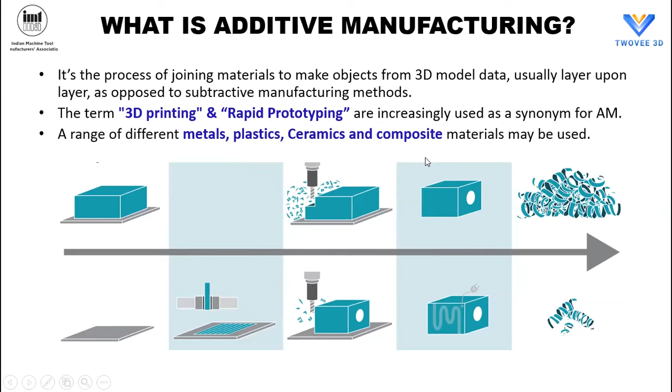That's the reason why this technology has become very popular, and we say this is going to be the future technology which industry will adopt to address many manufacturing challenges, or how to reduce manufacturing time.

Typically, I tell all the people that it is not that additive manufacturing will replace conventional manufacturing. It only complements conventional or subtractive manufacturing. They work together to bring speed into manufacturing activities and also address challenges where certain designs cannot be done with the subtractive way of manufacturing.

This is a good example showing how additive manufacturing has benefits over conventional manufacturing. A typical teacup, if manufactured with conventional machining like CNC, requires taking a bar stock, creating the internal cavity, machining to get the undercut, making the handle as a separate part using welding, brazing or soldering to fix it, and then machining the bottom. So there are multiple processes involved to finish this component.

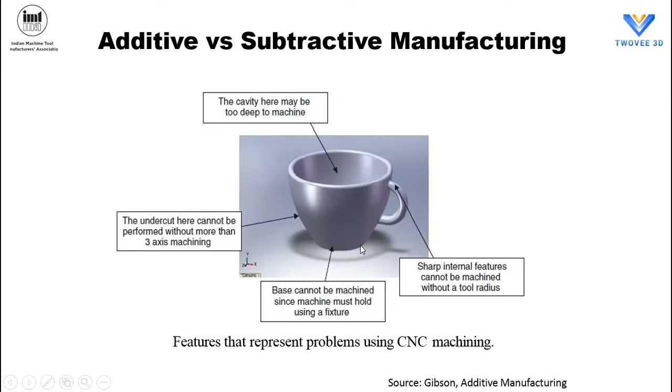Whereas the same cup, if done through additive manufacturing, is made as just one single assembly—it starts from the bottom, building the base, and as the layers build up, it gets the shape and size we want. So that's a good example showing how additive manufacturing simplifies the manufacturing process.

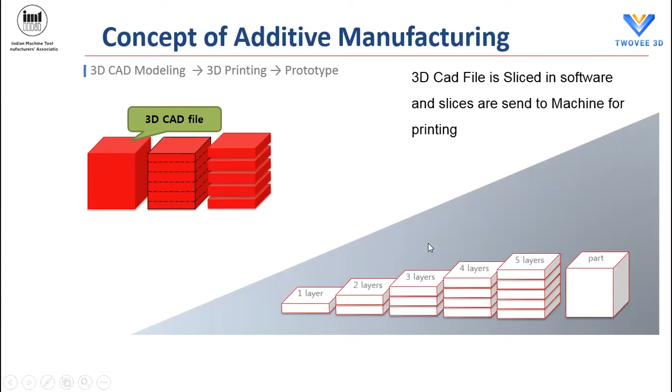As I mentioned, the 3D CAD file is an important input for this additive manufacturing process. Using this 3D CAD file, parts are built layer by layer, and we get the shape and size we want. The typical AM process consists of these 5 steps.

First, the most important thing is the creation of the solid model. Most current day youngsters prepare their drawings as well as 3D models with CAD software, maybe SolidWorks, CATIA, or AutoCAD—most of them are familiar with that.

But there is additional technology involved when preparing the 3D model for additive manufacturing. This is the knowledge engineers need to add on to the CAD knowledge they have, so that they can make the model additive manufacturing friendly.

Once we have that model, it's typically converted into a neutral file format called the STL file. The reason is the STL file is a neutral format which can be opened in many CAD softwares, as well as pre-processing software that most machine manufacturers provide.

We also need to ensure that when the model is converted to the STL file, we don't face any problems where some features may not be completely captured. So that's the additional care we need to take to ensure the STL file properly captures all the features.

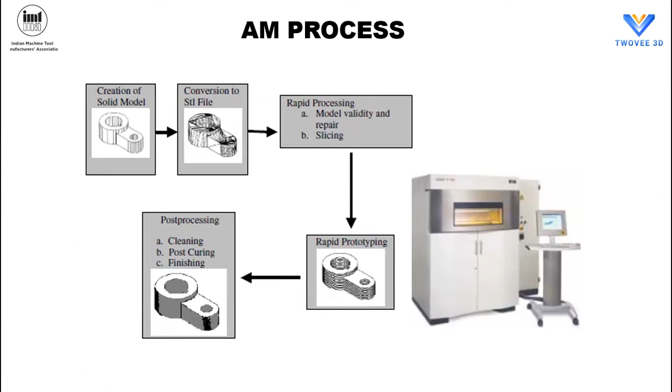And then, of course, today the technology has much improved. There is a lot of automation which has happened to enable this. But as an AM person in the organization, you need to understand all this technology.

So what are all the AM processes and the materials which are available today to the industry? This is the way the additive manufacturing process has been classified by ASTM. There are basically 7 types of additive manufacturing processes, and whatever new process comes up, ASTM is able to classify it among these 7 types. The first one is photopolymerization, VAT photopolymerization.

It was also called stereolithography. This is a technology which was there almost 35-40 years back, and it was limited to plastic. You can also see the dots I have put here - these dots indicate the raw material type. VAT polymerization uses liquid as the raw material, and then either you use a thermal source or a photo source to solidify that liquid. Both the solidification and the layer thickness are controlled so that you finally build the part.

Subsequent to stereolithography, other things also came in, like liquid thermal polymerization or beam interface solidification. They are all classified under the stereolithography process.

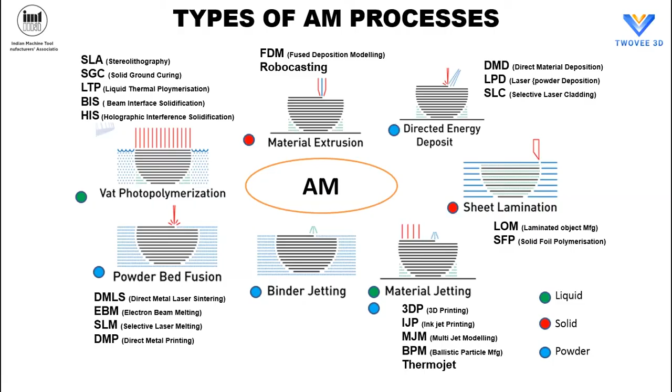So that's the wide range of processes we deploy for additive manufacturing. The materials used in additive manufacturing play a big role in producing quality parts, whether it's the FDM process, laser sintering process, or material jetting. The powder, the raw material, plays a big role - it decides the strength of the part, whether tensile, compressive, or fatigue strength, all decided by the alloy as well as its purity, and its geometric parameters play a big role too.

And it also decides the surface finish of the part, and the accuracy of the part we can build.

The raw material is another important part of the AM industry, and it is a special process, especially when you have to have a powder. They use a process called the atomization process, wherein we control the size and shape of the particle, the distribution of particle sizes, the oxygen and nitrogen content, and the density of the powder. These are the important properties which need to be controlled.

There is a lot of material science and metallurgy involved. In fact, there is a lot of research and development around this whenever a new material is developed for the additive manufacturing process. The microstructural analysis, and once the part is built, if there are any blowholes or cracks, how that can be controlled by properly controlling the energy source, plays a big role in building a good quality additive manufacturing part.

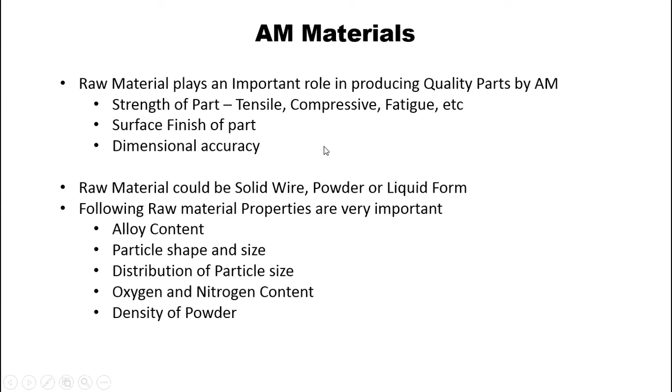So this table, I will not go through in detail, but just to give you a glimpse of the material types, as I told, it could be polymers, metals, ceramics, or even composites. Then what AM processes is used?

If it is a polymer, as I mentioned, the most common process used is either laser sintering, fused deposition modeling, or 3D printing. These are the technologies widely used for a wide range of plastic materials, whether thermoplastic or thermosetting type. You can see the range of materials used - almost all the polymer variants used across industries are possible to be done through additive manufacturing today.

For metals, the technology is basically laser or electron beam technology, called either laser sintering or laser melting. You can see the range of materials covered today, and this is growing every day. In fact, about 4 to 5 months back, copper was not easily printable. The Objectify company in Delhi optimized the laser process so that they can build copper alloy also using additive manufacturing. And as you know, copper is a very good conductor, especially for many heat exchanger applications.

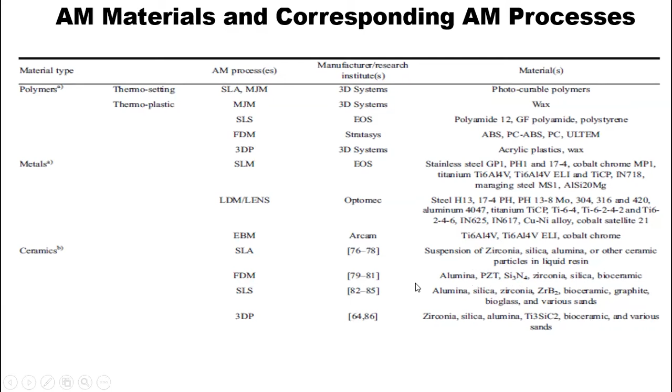So all the silica based, all those composite ceramics can be done through additive manufacturing. Similarly composites - whether polymer to metal composite, polymer ceramic composites, metal composites, or carbon reinforced plastics - all that could be done through additive manufacturing. Even functionally graded materials, where the property of the material varies across the dimension of the component - such varying strength components can also be produced through additive manufacturing, either by having different materials, or introducing blowholes or gaps in the way you build the property, or through cellular structures.

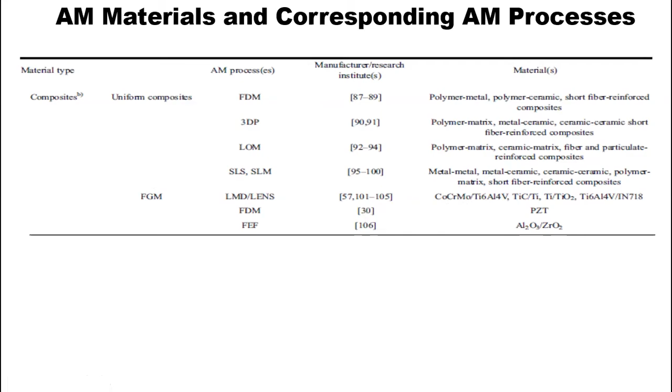So that's the process and the materials. I'll talk about the applications and benefits together so that you will understand in a better way.

One of the big applications where we get the benefit of additive manufacturing is in weight reduction. Because of the way the part is built, it is easy to build a part by taking out material where it is not needed, depending on the functioning of the part. As a good example here, what is shown is the seat buckle, used in aircraft, and of course also used in many automobile applications. Typically this is made of conventional steel, and the part is designed this way so that it is easy to produce, keeping the cost into consideration using conventional manufacturing. This buckle typically weighs about 150 grams.

Now with additive manufacturing, if you just modify this design, you need to ensure that you are meeting all the functionality of the part, but wherever there is an opportunity to take out material, you can do that so that the weight reduces from 150 grams to around 70 grams. And since you are manufacturing out of additive manufacturing, this part is very, very easy to manufacture.

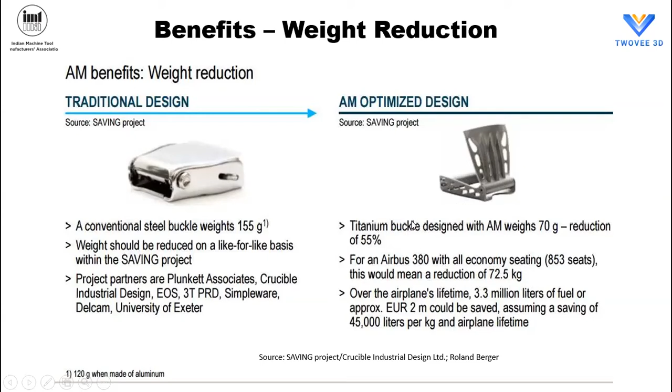In an aircraft, every gram of weight you save leads to fuel efficiency. In fact, in an Airbus 380 aircraft with about 800 seats, you save a weight of 72.5 kg. Just imagine over the life of the aircraft, what fuel saving and economy benefits you get out of this. So this is a good example, especially on weight reduction.

There are a lot of applications. Topology optimization is one design tool wherein you can optimize the geometry, keeping in mind how the stress distribution happens in the component. For example, this bracket, you can see there are a lot of areas with very low stresses, and you can take out that material. So by optimizing, you can reduce the weight almost by more than 50%.

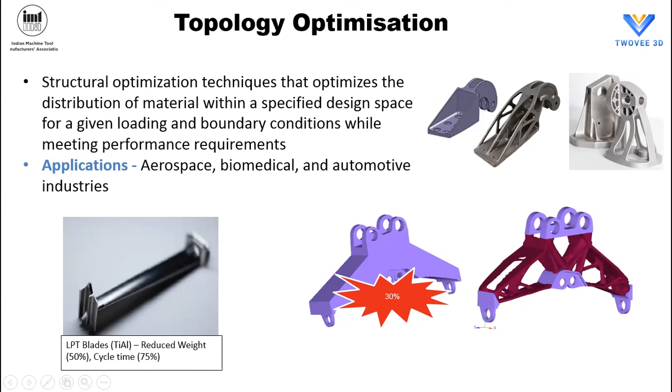In fact, this is one of the engine mounts which Honeywell designed, wherein you can optimize it by reducing the weight. And this is the low pressure turbine blade used by General Electric for their LEAP-X engine aircraft, where the weight is reduced by more than 50%, and the cycle time reduction is also 75%. So this is one of the big benefits we get from additive manufacturing, wherein we can optimize the weight without affecting any of the functionality.

In additive manufacturing, one of the cost elements is decided by the powder or raw material you are using. By optimizing the weight, you're also reducing the powder consumption, and you're also reducing the time it takes to build that part. And then, of course, ultimately, all that helps in reducing the cost.

The other big application is customization. Wherever customization is required, that can be easily done by additive manufacturing. There are few reasons why it can be done very easily, because there are no tools involved in additive manufacturing, and customization doesn't involve multiple processes. It is just one single process where you are building the part.

Any feedback you get from customers for the customization can easily be incorporated. Whereas with conventional manufacturing, it is very difficult. Whether you do turning, milling operations, or use casting or forging applications, there are tools involved, and any changes to that design also require you to modify the tools and the manufacturing process.

The example I'm showing here is for the medical application, and this is just an example, but as I mentioned, wherever customization is required, that can easily be done. In dental applications, the crowns which are used—in fact, every individual is different, and you cannot have any standardization here. And of course, it also needs very high strength, and most of this is done out of titanium, which is a printable material with additive manufacturing.

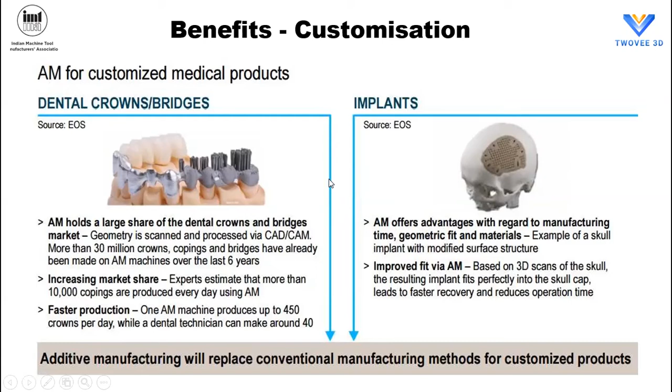So there's a big application of customization required in the biomedical industry, and additive manufacturing has been very widely used.

Then there's the complexity of the part you can build using additive manufacturing. You need to make the part more complex so that you get better performance. That is one thing. The other is you can make the component at a lesser weight, and then you can make it at a lower cost.

With additive manufacturing, irrespective of the complexity of the part, the cost doesn't vary much—it's almost flat. Whereas with conventional manufacturing, if the part is very simple, the cost could be less, but as the complexity increases, the cost increases exponentially. That is where you start getting the benefits of additive manufacturing for complex designs.

There are a lot of applications of additive manufacturing where you can come out with very innovative products, leveraging additive manufacturing, so that some of the limitations we had in manufacturing such components with conventional manufacturing are addressed very easily, and you can get the best performance from the designs. So the innovative design is...

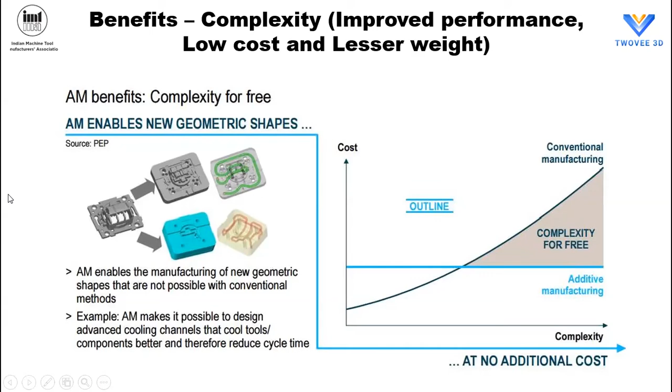I'm just showing one example where the cellular structures, or the helicoil designs, were known 20, 30 years back, but applications were very limited because of the difficulty in manufacturing this. But now with additive manufacturing, all this is possible. So you can improve the strength to weight ratio, the heat transfer rate, the thermal insulation, or also have a part with a negative Poisson's ratio, good for acoustic purposes. So all that design is very, very easily possible leveraging additive manufacturing.

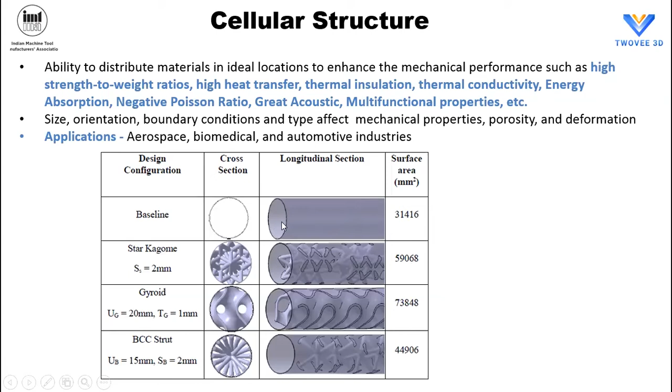In fact, this is one straight tube duct. As you know, heat transfer depends purely on surface area, and you can improve the surface area by having this type of cellular structure, and then almost get more than double the heat exchanger efficiency with additive manufacturing. So the tube duct can add multifunction here. Apart from transferring the fluid, it also can do the heat transfer function.

Then the fourth big advantage is part consolidation. You can consolidate the parts together as one single assembly. Typically, for example, this fuel nozzle, which is a standard example talked about by every additive manufacturing professional, is a part made by General Electric for their LEAP-X engine, which is in the Boeing 737 MAX aircraft. This is typically made out of 20 parts, but now converted into one single assembly. In the process, you've eliminated the assembly fixtures required, eliminated special processes like brazing and laser welding and other things, and reduced the uncertainties involved during the assembly process. That way, you also manage the number of parts.

So that's the big advantage of consolidating the parts. So that's why when you do additive manufacturing, you just check the adjacent parts and then see whether all the parts can be consolidated into one single assembly.

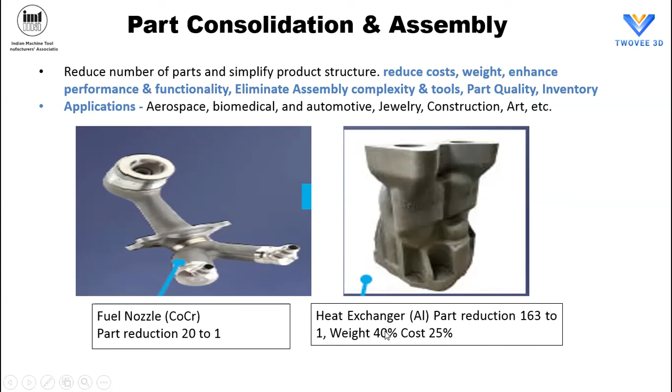Heat exchanger is another part. This is also a part that is in the flying aircraft, the Boeing 737 MAX. This typically has about 163 parts, but with additive manufacturing, it's just one single part, with weight reduction of 40% and cost reduction of 25%. So those are the part consolidation benefits you get from additive manufacturing.

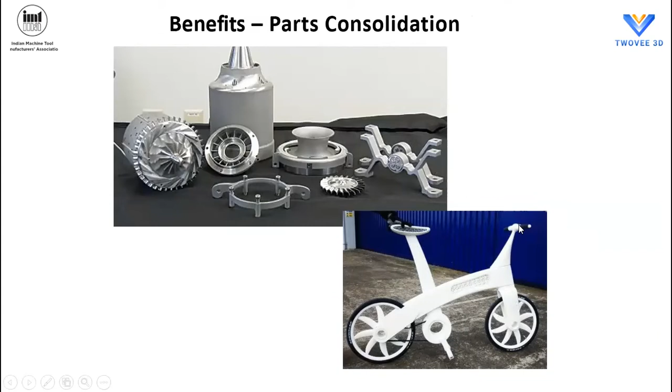Some more examples: you can see this bicycle, which would typically have been made of at least 15 components, but now the entire thing—the frame, the wheel, the handle, and the seat—everything is made out of one single assembly. So those are the big benefits you get from additive manufacturing, apart from the material savings—no tools involved, and reduced inventory.

In fact, I'll show some examples. The product development cycle time could be reduced by as high as 70%. And since it is not getting into final production, we are not really bothered about the volumes and the cost involved, especially the high volume ones. Additive manufacturing may not be cost efficient, but for doing all the initial product development activities, prototyping is the application where it is used.

Then there's direct part replacement. You may have difficulties and challenges producing an existing part because the supplier may not be there, especially the casting industry is facing some challenges. If the casting house gets closed, then you have to identify another casting house, develop the die casting tools and other things, and again go through the validation process. In such cases, it is much easier to adopt direct part replacement.

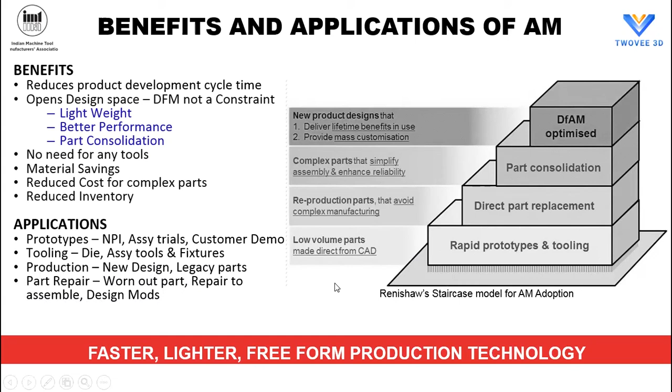So those are the applications across industries, whether aerospace, automobile, or medical industries, or jewelry industries, everywhere it is being used. Additive manufacturing can also be used for part repair activities, especially on worn out parts. You may rebuild, refurbish, and then use it. Or during assembly stages, if you have to do some rework to the component, that can be repaired. And if you have to do design modifications to address some in-service problems, you can still salvage that part and use it. So those are the big benefits why industries are getting into this technology.

I want to give an overview of how the applications of additive manufacturing have developed. As I mentioned, around the 80s and 90s, the big application was mainly prototyping type activities, and it was limited to plastic. Then around 2000 to 2010, plastic parts were even used for many aerospace as well as medical applications. That's where the application started getting used for production applications.

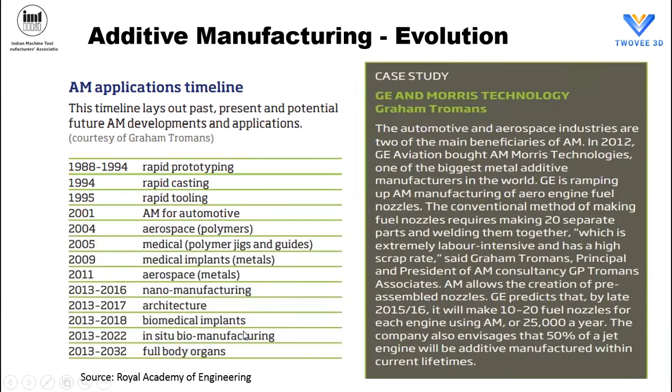And then once metal additive manufacturing started around 2010 onwards, it has been used for many aerospace applications, space applications, or even automobile applications. It's being very widely used. Today it is used for many precision parts. Biomedical implants can also be done through additive manufacturing. So that's how the industry has grown.

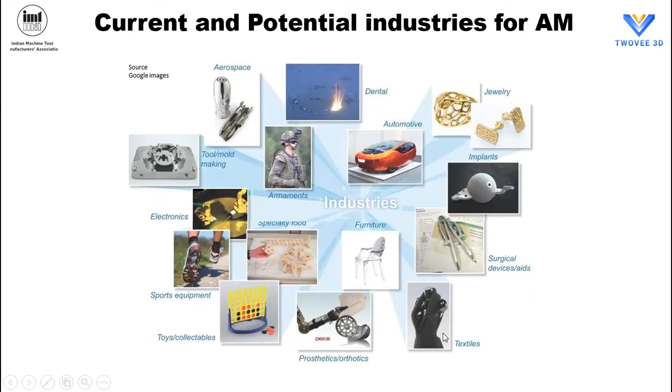Keeping this in mind, recently I was involved in a survey sponsored by the Ministry of Heavy Industries as well as the Ministry of IT, to see what is happening in the country in additive manufacturing. This survey also covered industries: automotive, aerospace, healthcare, construction, electronics, art and jewelry. So all these industries in India are also using it. For example, on automotive, Tata Motors and Maruti are leveraging additive manufacturing for many new product designs, for prototyping, and especially for some plastic parts, they are even using it for production applications.

In fact, BMW and Ford have very big additive manufacturing technology centers in their global facilities. Similarly, aerospace industries have all been leveraging additive manufacturing. And if any aerospace industry is not leveraging additive manufacturing, they will lose the competitive edge in getting high performing aircraft. On the cost side also they will lose out, so they will not be able to survive. That's where the technology stands for aerospace and defense applications.

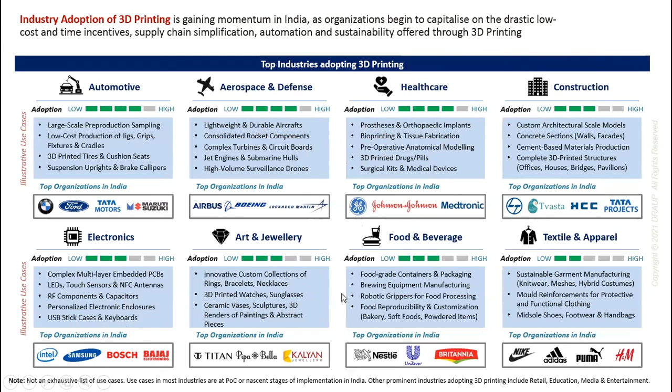So even for electronics components, Intel, Samsung, Bosch have leveraged additive manufacturing both for prototyping as well as for limited production applications. So that's across the industry where it is being used today.

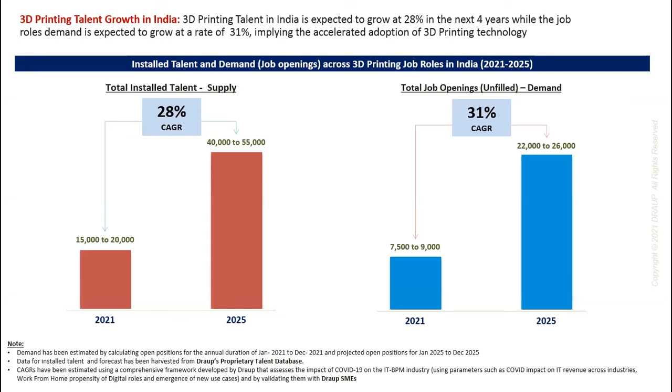This additive manufacturing is growing at an annual growth rate of about 28%. The installed talent supply is around 15,000 to 20,000, and it's going to grow to around 55,000. The unfilled gap today is about 9,000 against market demand, and it is going to grow to about 25,000 by 2025. This is keeping in mind that skilled talent is being developed by the industry as well as educational institutions, but there will still be a gap. So this is a big opportunity for skilled manpower to be deployed across industries.

And what type of skills are we talking about? We are talking about CAD modelers, 3D modeling designers, leveraging additive manufacturing. That's the big thing. It is easy to develop this skill because most of them already had CAD development skills.

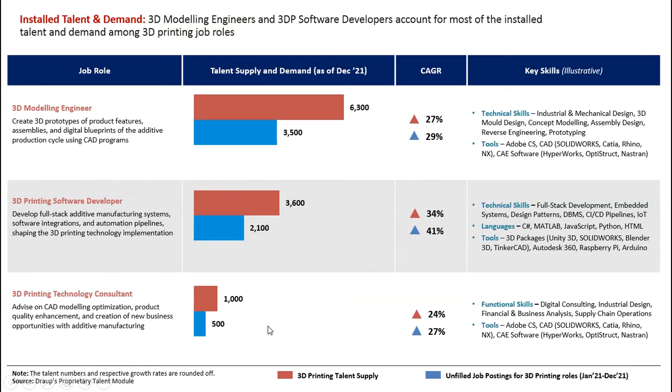So they need to understand the AM process, the AM designs, and then how the design can be made AM friendly, and then we can quickly build these skills. There is a big requirement even for the software. As I mentioned, one is the CAD software itself and how automation could be done around that. Then there are the pre-processing softwares, and a lot of simulation tools being developed today to simulate the entire printing process. So there's a big requirement for software people, and of course the technology consultants. Those are the type of skills the industry needs.

Venkatraman talked about the Twovee 3D services, I'll not go into much detail. Basically we have three components. One is the training, the different types of trainings we are giving - introductory as well as advanced trainings. We can also provide hands-on training to industries for a week or for 6 weeks, where we take a complete case study and they go through the design for additive manufacturing process, and also get an opportunity to work hands-on with the printers, so they are fully capable of deploying that technology in the industry.

And if the industry wants any support on additive manufacturing strategy for deploying it, or on business development, that's the other area where we support. In fact, we are involved with some 3 or 4 industries today to enable that to happen.

Consultancy, design consultancies - if you don't want to spend too much time but you want to really come out with innovative products, or speed up the existing product development cycle time, or if you want a small additive manufacturing lab in your facilities - in all those areas we can provide design consultancy. As I mentioned, I have been one of the pioneers in the Indian industry for the last 12 to 14 years, typically in additive manufacturing only, and I know all the people who play with the big players in additive manufacturing.

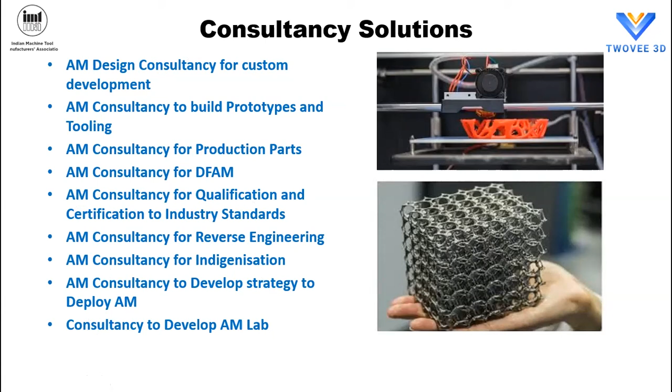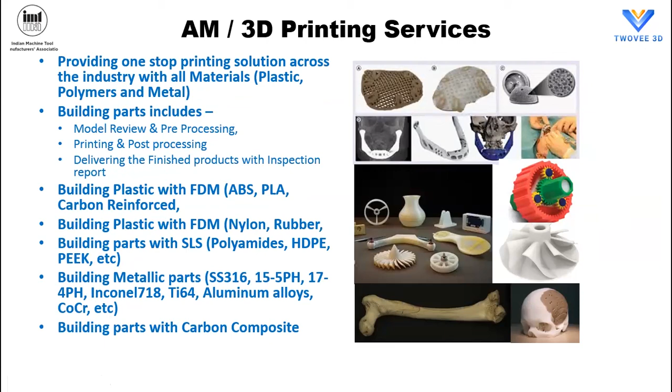And then we can leverage some of those facilities which are available to provide these types of consultancies. Then of course, printing as a service, whether it is metal or non-metals and different types of polymers - we have a facility with printers for plastic printing. For metal printers, we are tied up with people like Wipro 3D, Intech Solutions, or Objectify. Those are the people with whom we have tied up, and we can provide printing as a solution.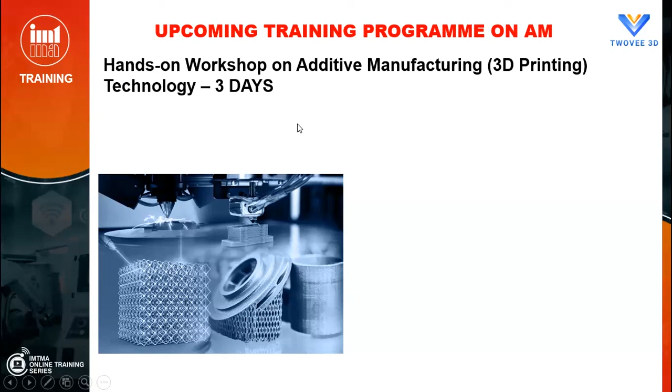So we have also tied up with IMTMA in organizing a hands-on workshop on additive manufacturing and 3D printing. It's a 3-day hands-on workshop which will happen at the BIEC Training Center, coming up on November 16th to 18th. It's a 3-day full program which will give full exposure to the additive manufacturing process, applicable for both metals and non-metals. We have a 1-day program giving hands-on exposure to part design as well as printing with both metals and non-metals. We have optimized the content so the industry can get the best benefit from this 3-day program. Registrations are open, and interested participants can go ahead and register.

This is the maximum number of participants we are targeting - only a maximum of 20 people, because it's hands-on and we want to ensure there is a lot of personal touch, so everybody gets the opportunity to learn. These are the topics which we are covering as part of this 3-day workshop.

We'll give a complete technology landscape, talk about the details of the processes I just mentioned today, but each of the processes is a technology in itself. So we'll talk about all those details about each process, the different 3D printers available for each process, and details about all the materials. As I mentioned, materials is a big area of technology around material science as well as metallurgical aspects, and how the quality of the part is affected by that. We'll talk about a lot of applications, pre-processing models, the design for additive manufacturing approach, and what type of post-processing is involved.